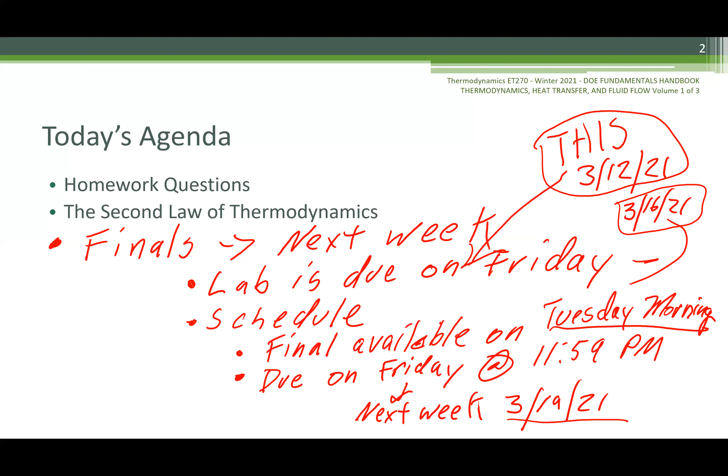Okay, so now we're going to get to our last thing, which is the most difficult thing to understand. I have to say that. It is one of the hardest things to understand. It was very difficult for me to understand. And that is the second law of thermodynamics. So we're going to define and state the second law of thermodynamics.

We're going to use the second law to determine the maximum possible efficiency of a system. We're going to look at a system and conduct an analysis using the second law of thermodynamics, meaning max efficiency. This is the only part of the second law we're leveraging: max efficiency. Given a thermodynamic system, we're going to describe the methods using the maximum efficiency of a system.

There's another part to the system, and you guys understand it a little bit, but we're not going to dig into it too much, because I believe if I have to teach you something, it should be what we're going to learn today when it comes to the second law of thermodynamics, because it's the governing principle of it.

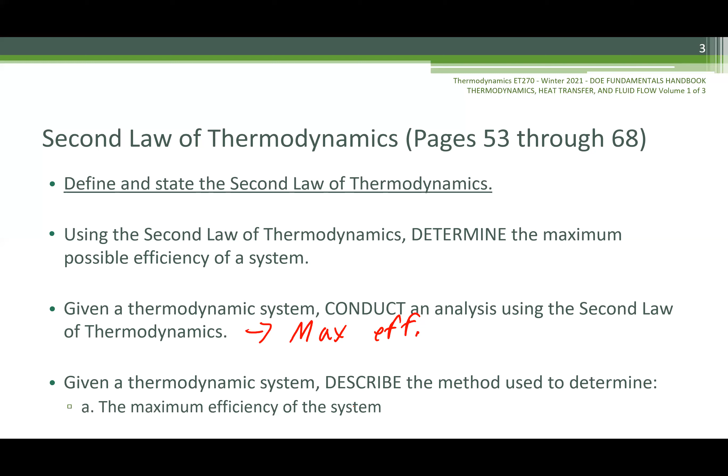So what is the second law of thermodynamics? You could read this very, I guess, convoluted explanation: It is impossible to construct a device that operates in a cycle and produces no effect other than removal of heat from a body at one temperature and the absorption of an equal quantity of heat by a body at a higher temperature?

So what it's really saying is it's impossible to move energy from a body at a lower temperature to a body at a higher temperature that doesn't produce any other effect, meaning moving that energy from a body at a lower temperature to a body at a higher temperature takes extra work. You can't just move the energy.

So that simple thing, that you can't move energy from one body to another without producing other effects, other energy losses — more energy must be put in than you get out. It causes many different things, but it is a law. It's a simple law, but at the same time, the simple law causes many things that are not simple.

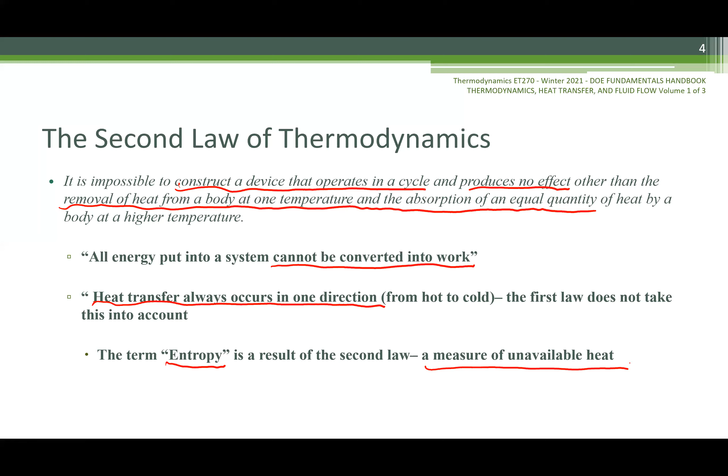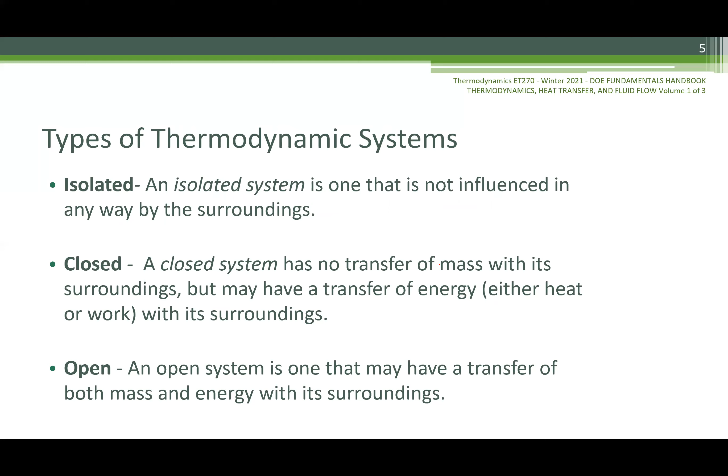But now we're just going to talk about entropy. Remember what entropy is? The change in Q with the change in T absolute. When I say absolute, it's in Rankine when it comes to the British English units.

This is the amount of heat added to the system during the process, right? So if you add heat to a system during a process, like you're making the system get hotter, right? Well, just think about it. You're fighting the current of everything getting colder all the time, right?

It's like you're walking something up a river that everything is going, pushing against you, but you're walking it up a river. So no matter what, it's going to take you more energy to walk up that river than the energy you will deliver to that point in the river. I don't know if that just confused you more, but I just thought of that and I thought it was brilliant. I'm going to use that one again.

Does that make sense? I feel like it does. You feel like it does? Yeah, okay, yeah it does.

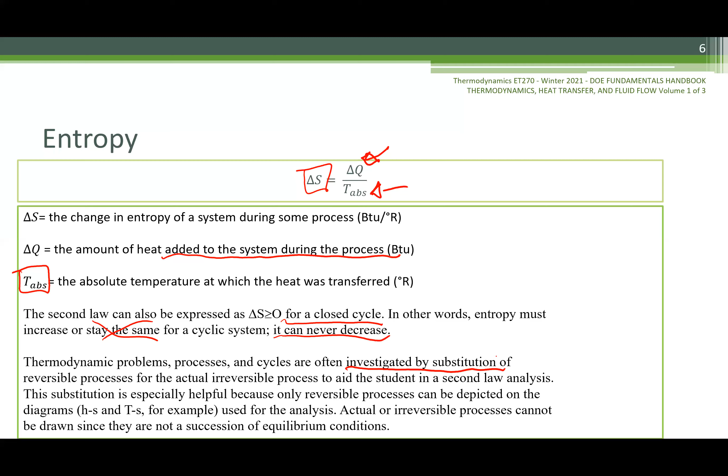But in actuality, we have been investigating by substitution of reversible processes, adiabatic processes, for actual irreversible processes to aid the student in the second law of thermodynamics. That's what it says in the book, but I'm going to tell you the truth. I still use adiabatic processes to calculate things, especially as an energy engineer. I do a lot of building energy engineering, so I'm thinking about the entropy of a compressor loading up refrigerant as something so minute and microscopic that I actually ignore it, it's so small.

But I'm not looking at power plants, big renewable energy plants, cogeneration, or anything like that. But for my profession, I still hardly ever leverage the second law of thermodynamics. So what you have learned in this class and these concepts are transferable. It's not like you're missing anything. Well, you are missing something, but it's not like you can't learn it on the fly.

And so I do use these diagrams in my profession. The enthalpy diagram and the temperature entropy diagram used for analysis. It's saying actual or irreversible processes cannot be drawn since there's not a succession of equilibrium conditions, but they do have other diagrams, one that I use often is a pressure versus enthalpy diagram. And that diagram has entropy lines, so we can use them if we want to. So all of this isn't totally true, but it's just good to understand that you can use the first law of thermodynamics even without entropy and come up with good approximations of what you're trying to do.

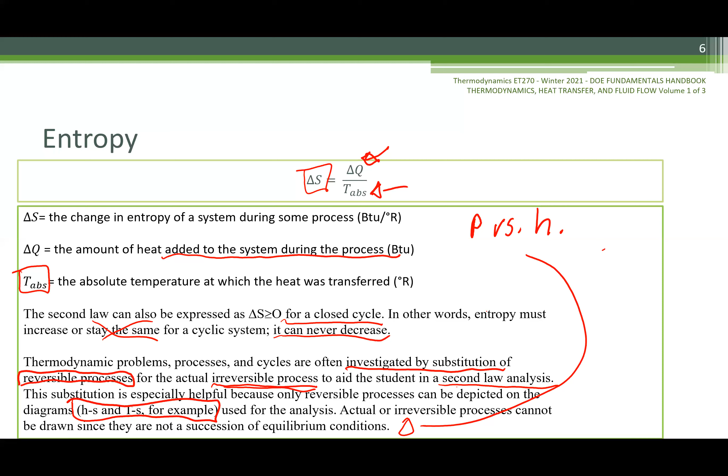But what we're going to learn about, so that's pretty much all we're going to learn about entropy. You understand it always travels from hot to cold, no matter what. If you're moving heat, if you're adding heat to a system, period, you're fighting a current. So if you're fighting that current, it's going to cost you. So since it's going to cost you, entropy is involved.

But the Carnot principle is really the judge when it comes to how efficient you can be. It's the judge. So Sadi Carnot, I think is crazy. In 1824, he advanced the study of the second law by disclosing a principle consisting of the following propositions. And this principle is the law, and I don't know how he thought of it, but he did. I just like Einstein and Euler's formula, they're magical people.

So this is what we're going to focus on for the rest of today. We're going to do two examples, and then I'm going to let you loose, and you guys can work on your lab, get stuff done.

So the basic concepts of the Carnot efficiency is that you cannot be more efficient. Any process can be any process when it comes to transferring heat. You cannot be more efficient than Carnot efficiency. In Carnot efficiency, you're thinking, well, what does that mean? Well, that's the maximum amount, the biggest percentage of energy you could transfer based on the hot temperature and the cold temperature of where you are at, period.

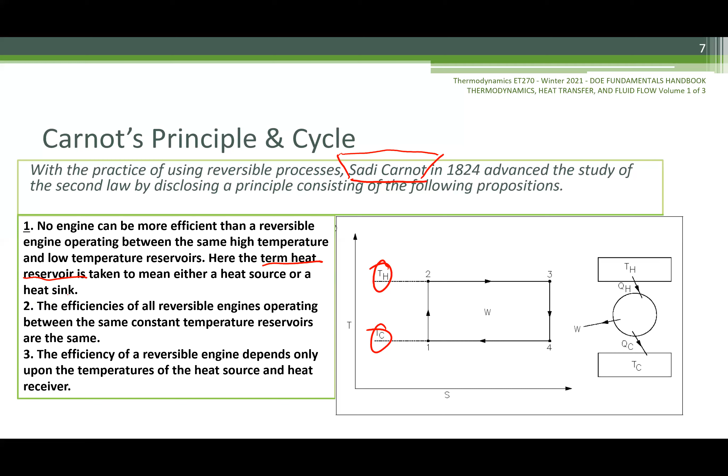So you can see number 1 here through 3 is that an engine can't be more efficient than a reversible engine operating between the same high temperature and low temperatures. Here, the term heat reservoir is taken to mean either a heat source or a heat sink. So an engine can't be more efficient than its heat source and heat sink. The delta between them, like I said, the difference. This determines its maximum efficiency.

Okay. So even if it's reversible, but remember, we're dealing with entropy, which is that governing omniscient power that says everything will get colder from here on out. So entropy makes it so that no process is reversible. But even if you consider a process reversible, it cannot be more efficient than its temperature hot and its temperature cold.

And we'll see how to use these two different, the heat source and the heat sink. So it keeps saying the efficiency of a reversible engine depends only upon the temperature of the heat source and heat receiver. So they keep mentioning this reversible thing, right?

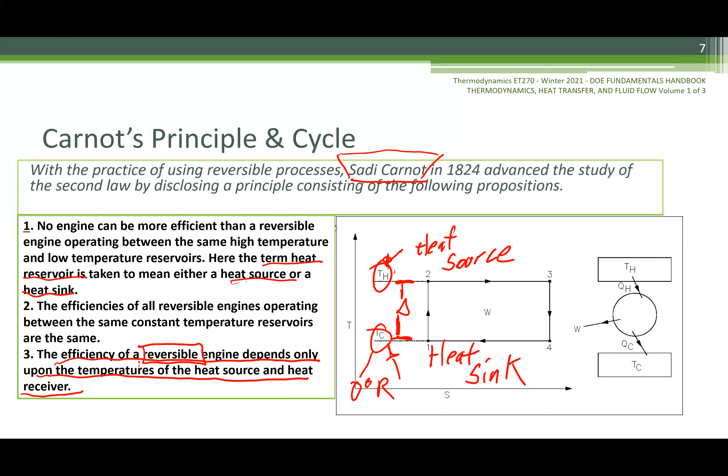So we're going to demonstrate this in a simple cycle and examine the proposed heat power cycle that consists of the following reversible process. So we're going to go from 1 to 2.

This is adiabatic compression from temperature cold to temperature hot due to the work performed on the fluid. So here's temperature cold, here's temperature hot. So work is performed on the fluid. So we're compressing a liquid. And as we compress the liquid, the temperature increases.

So then they wanted to make sure you understood this is an adiabatic compression cycle. So that means that there's no entropy loss. We're not even worried about entropy.

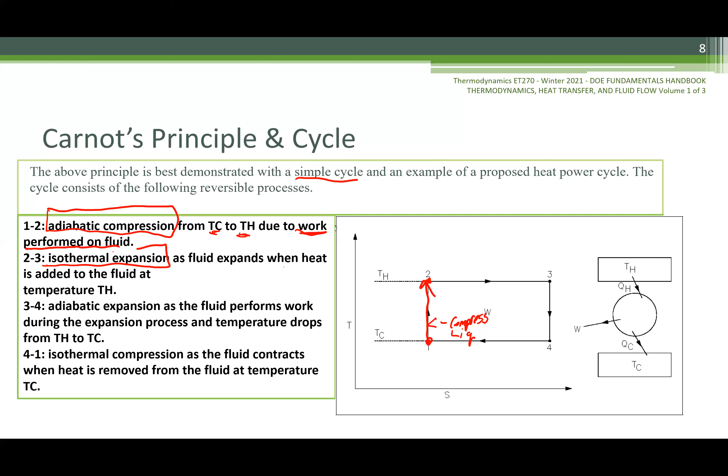Then there's isothermal expansion, as the fluid expands when heat is added to the fluid at temperature hot. So heat's added to the fluid at temperature hot. The fluid is expanding, but it's not getting hotter, right? The reason it's expanding, so the enthalpy is changing, the internal energy is changing, but the temperature, the sensible heat, the temperature of that fluid is not changing.

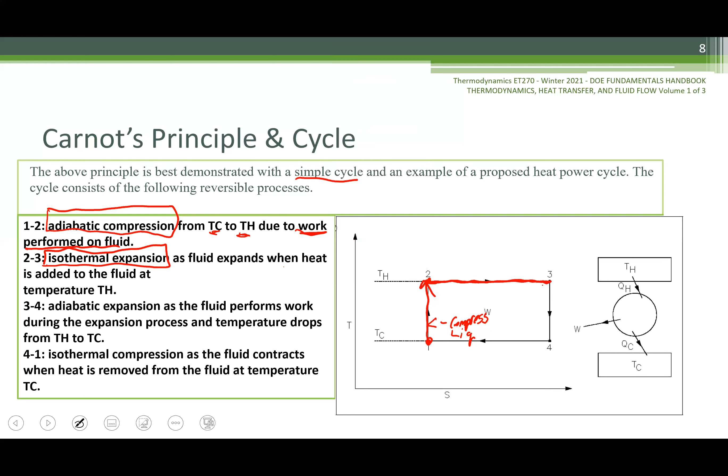So expansion, expanding. Okay, so then from 3 to 4 is adiabatic expansion as the fluid performs work during the expansion process.

So from here to here, this is where you can say, here are some examples of what's happening here. A piston fires, or it turns a motor, or it turns a fan. This is what happened with the expansion.

But the expansion, the amount of work that can be done from here to here is governed by the temperature cold and the temperature hot. So the compressed liquid got raised to the hottest temperature available. That's it. That's the highest it can go.

All right, then isothermal compression, as the fluid contracts when heat is removed from the fluid at a temperature cold. So this is the Carnot cycle, but everything is governed by the hot temperature and the cold temperature.

All right, so here we're going into problem number 1. An inventor claims to have an engine that receives 100 BTUs of heat and produces 25 BTUs of useful work when operating between 140 degrees and 0 degrees F.

Is the claim valid? Okay, so let's go through. What's the problem statement? Is the inventor's claim valid? Yeah, is the claim valid?

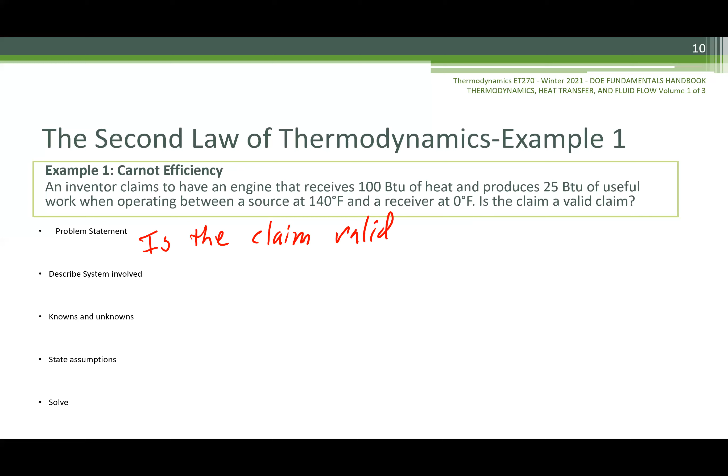What systems are involved? Well, we have an engine, right? Okay, we have an engine, so I'm going to draw that as one of these little things. I don't know how else to draw them. I used to draw engines. Okay. Produces 25 BTUs. So this way, I'm going to say this is 25 BTUs. And we're going to say into the system and out, we're going to say 100 BTUs.

All right, but then we're going to say this temperature here is a hot temperature that's going in, and that temperature is equal to 140 degrees F. And then they're saying this temperature here is 0 degrees F. All right, so that's the system involved, right? Yeah. Okay, so what's known? What's known about this system? We know temperature.

So this is the claim. Let me see something. All right, this is the claim. This is the system involved. Here's our known versus unknown. What's our known versus unknown? We know temps, right? Yeah, we know temps and then the energy going in and energy produced. Right. I'd agree with that, only though we're trying to see if his claim is valid, right? Is the claim valid? So temps are known.

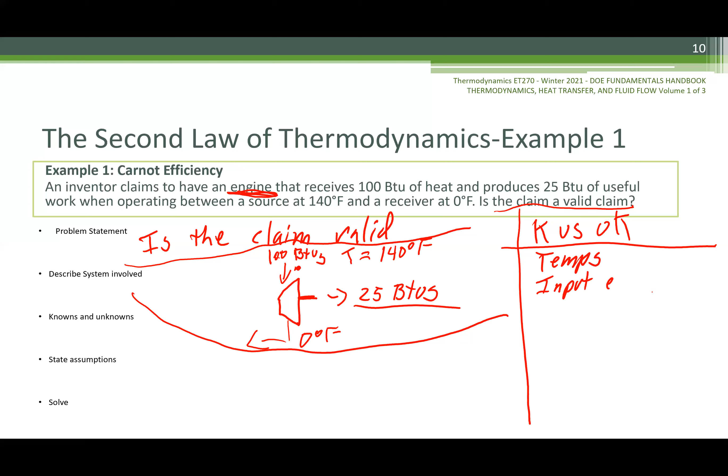We can say input energy. Unknown is efficiency. So these are knowns. So these are unknowns: efficiency and output energy.

Well, what assumptions do we have? We can just assume straight up that this system is adiabatic. And we can also assume it's isothermal. It does not exchange anything with the outside air. And this system includes the hot and cold temperatures. Okay. Yeah. So other than that, we're assuming it doesn't exchange anything with the environment, no heat transfer with the environment, and it's reversible. So it's adiabatic. Those are our assumptions. So let's solve.

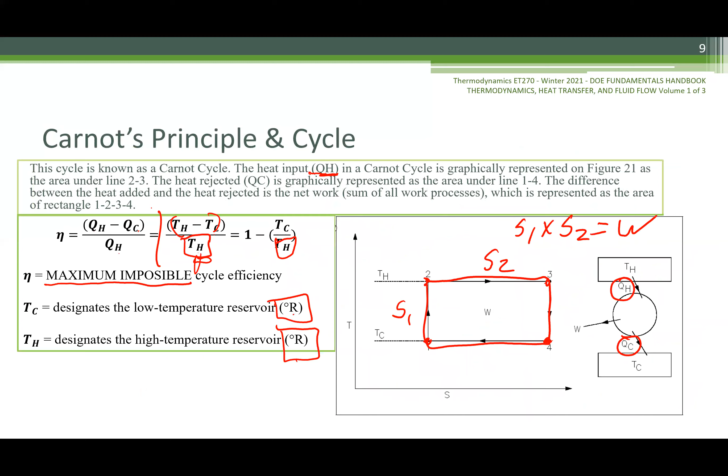So Q hot is 100 BTUs. T hot is in Rankine, I think it's plus 460. So T hot is 140 plus 460, that is equal to 600. And then T cold is 460. So then, what do we do with this information to find out the maximum efficiency? We go back to here and we use this equation: T hot minus T cold divided by T hot.

So 600 minus 460 is what? 140. Divide that by 600, what do I get? 0.233333, right? Yeah. 0.23. So that's the maximum efficiency, all right? So let me ask you, can he produce 25 BTUs? No, because that's more than 23%. Exactly, right?

So Q is equal to 23 BTUs at most. So unless he changes the laws of physics,

and there's a movie that just came out about entropy and going backwards and stuff like that. What movie was that? Or what? Tenet? Tenet. Yes, exactly. Unless he's in Tenet, he can't do this.

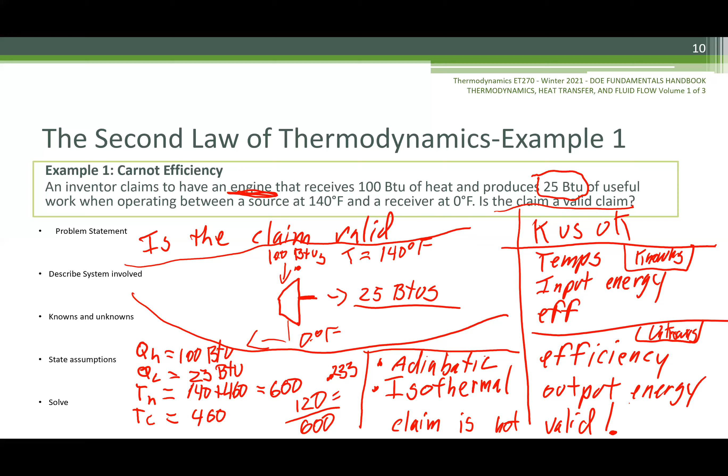Yeah, so this is impossible. So no, his claim is not valid. Claim is not valid. Okay. All right. So now we're going to move on to the second example, which is the actual versus ideal efficiency. So for this one, I think we have two for it. So we can move a little further on this one. Okay.

So if we read the question, the actual efficiency of a steam cycle is 18%. The facility operates from a steam source of 340 degrees and rejects heat to the atmosphere at 60 degrees. Compare the Carnot efficiency to the actual efficiency. All right, what's the problem statement here? Just comparing the actual versus the highest possible. Yeah. Comparing efficiencies. That's what I'll put here. All right.

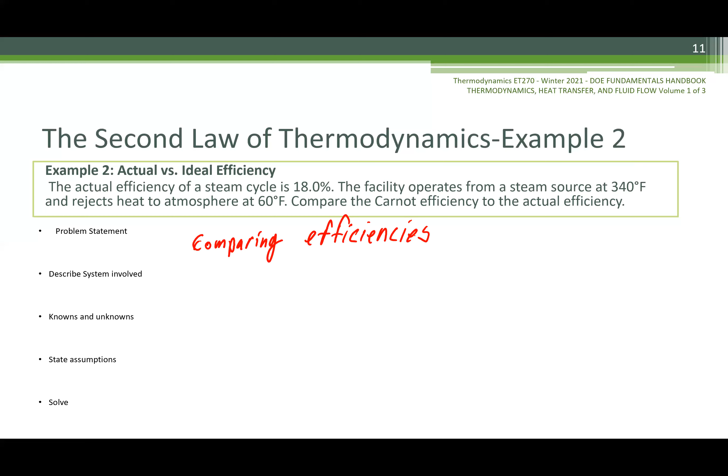Describe the systems involved. Well, it's the steam cycle. So you can draw a little picture. Here's the source, one like this. We'll make it simple. So steam goes from here, goes into a little turbine, comes out, goes to a condenser, comes out, goes through a pump, comes out and goes there. So there it is. And then we know this efficiency is 18%.

What else do we know? We know that T hot is equal to 340 degrees F. We know that T cold is equal to 60 degrees F. And we do not know the Carnot efficiency. We know this is the actual efficiency. Okay, so what are the knowns and unknowns?

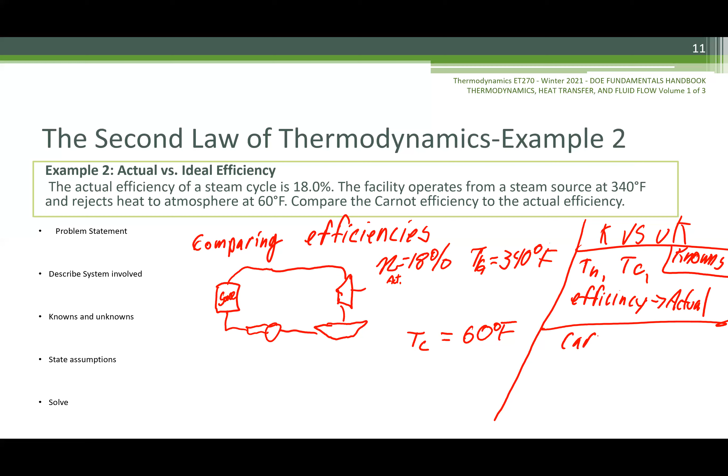And based off what we're doing, we're all professionals now. We know what we're doing because we've been doing thermo for a while. We don't really need to know any more than that. Those are the unknowns, like what the flow is, what enthalpy, what internal energy, pressure, all that other kind of stuff. We're not worried about that right now. We're just worried about the efficiencies, and we have everything for that. But what we do not know about the efficiencies is Carnot efficiency, right? This is the unknown.

All right. So we can state some assumptions. What assumptions are we going to state? Well, they've said the system is 18% efficient. Let's see, what other assumptions could we state? That this system, T hot and T cold, is isothermal. So we're not considering anything being transferred beyond what we have stated here, meaning we can assume that, and we can also assume it's adiabatic. The reason why we can assume that it's adiabatic is because we're not considering entropy. So isothermal and adiabatic. Those are our assumptions.

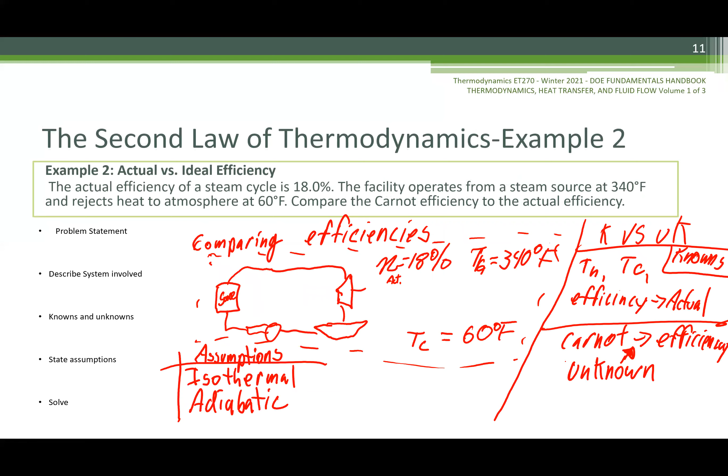So when I say isothermal, I'm saying no heat is transferred from here to here. This does not happen. And I'm assuming that this process from here to here can also go this way without suffering from the laws of entropy. Therefore, it's adiabatic. All right, so now let's solve this.

We know that T hot is 340 degrees. So 340 degrees plus 460 is what? 340 plus 460 is 800, right? Mm-hmm. T cold is 520, so 520 R. Therefore, T hot minus T cold divided by T hot is equal to 0.35, 35%. Now, what was the efficiency that they said they had? 18%. Now, does anybody wonder why that is what it is?

Okay, so now we're looking at an actual TS diagram. And our Carnot efficiency is here. But, probably because of limitations in their system, this is what they have to go through in order to get their process done. We're going to skip back and forth on a couple slides here so we all can see this. But this is the process: 1 to 2, 2 to 3, 3 to 4, and 4 to 1.

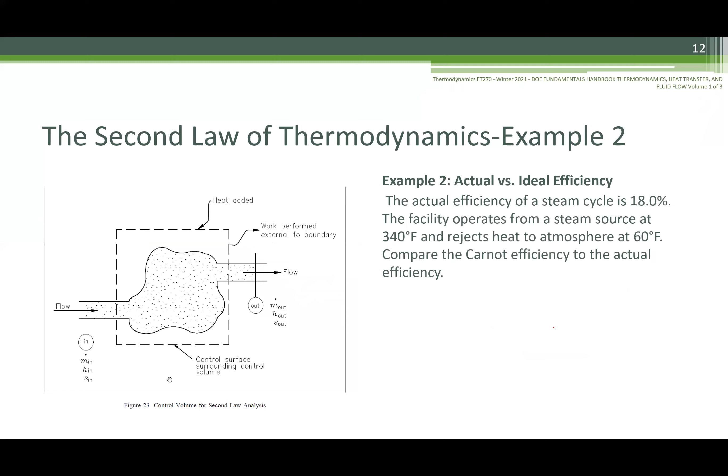Okay, what is 1 to 2? Remember what 1 to 2 is. It is compression, right? You guys can just help me remember and we'll talk about it, because I'm too old to keep things in my head. So 1 to 2 is compression. So that happens here. No, that happens on the feed water pump. So from here to here is compression.

So then we start from 2 to 3. And remember, it says heat is being added to the system, right? Mm-hmm. Okay. So heat is added to the system, and that's where it's added here. And it's still being compressed, right? Because heat is added and movement is starting, so it's still a compression. So that's from 1 to 2, and then we're going to go from 2 to 3.

And notice something interesting here: number 1, we started where it would be perfect Carnot efficiency, but in actuality, we started out here outside on the vapor dome, right? So notice where the Carnot efficiency is always located, right in the middle of the vapor dome. So at these top points here to here, this is where you can get your maximum efficiency inside of the vapor dome.

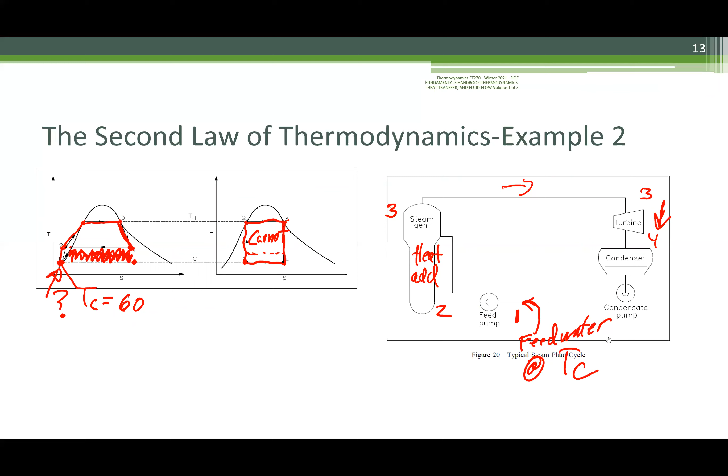From feed water at T cold. It quickly heats back up though. All right. Well, are there any questions about Carnot efficiency? Sort of. Sort of. Okay. I mean, I'm getting how to do it now. Yeah, I'm understanding this, but I'm peeking at the homework or the final lab, and it's given us a value of the temperature of the surroundings. I'm not seeing exactly where that fits in.

Let me see what it says. So it gives us the in temp, out temp, and then also a surrounding temp. The in temp, out temp. Is the surrounding temp lower than the in temp? Yes. And the out temp? Yes. That must be your heat sink. Because they're both steam entering turbine problems. Yeah. One, it's entering at a higher value and exiting at a lower value, but the surrounding is still lower than the lower value, right? By a substantial amount for both of them.

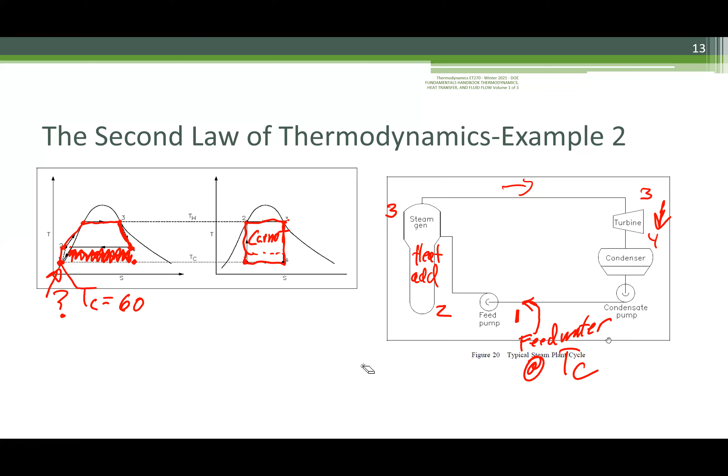Yeah. So kind of like this problem, right? Except you got to do some solving of the actual problem and you got to find out the efficiency. It kind of doubled it up in that problem. So you're getting to practice first law thermodynamics, and you're going to use the second law Carnot efficiency. Okay. Does that make sense, Nathan? Like, so just think about this problem we just looked at.

Let's just say you're focused on the efficiency part of that problem. If you're focused on the efficiency part, and from what you just explained to me... Oh, okay, you get it now? I get it. So the two values are for the first law, but the 60 is for the second law. Okay, I get it. So you're using the two values for the first law to find out the energy transfer, but then you're using the second law to see what the maximum efficiency is. Yup. I get it. Okay, thank you. No problem.

So yeah, the homework is a little rougher. It's just two problems, but I wanted to get you kind of ready for the final because the final ain't gonna be no walk in the park.

You guys, I don't want you to wait until Thursday to start it. Hey man, look, just because I've been breaking my brain and working problems for the last decade, I don't know if you're a geek like me, but I know that when I pick on something I can't let it go because I don't like being wrong and I like to figure things out. So I recommend that you take a look on Tuesday, read the problem, think about it, go about your day, think about the problem.

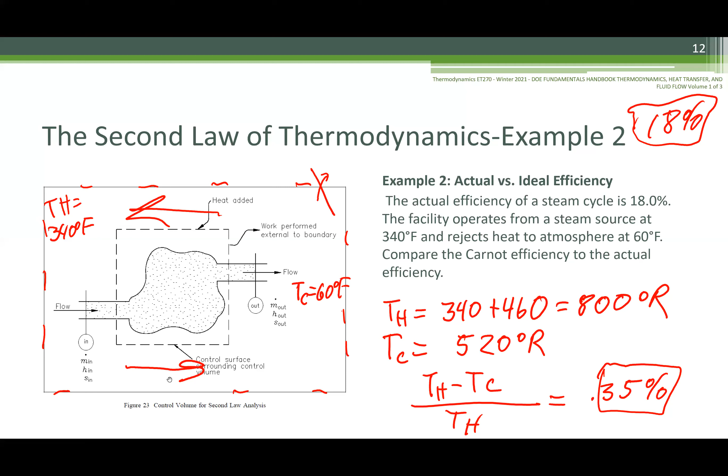Heck yeah, sounds great. You know where you stand, and we'll get her done. All right, you guys have a good night. Talk to you soon. Awesome, see you later. All right, bye bye.